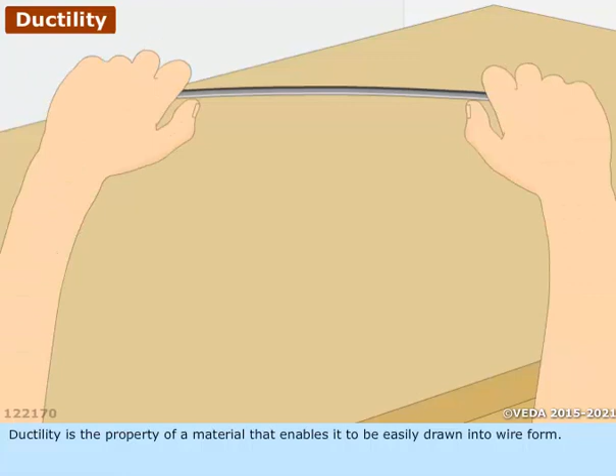Brittleness is defined as lack of ductility. When a load is applied, brittle materials break without bending or deforming.

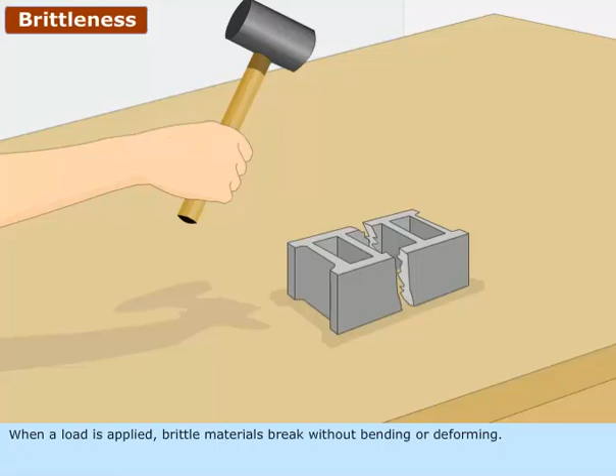Malleability is a property similar to ductility. If a material can be easily beaten or rolled into plate form, it is said to be malleable.

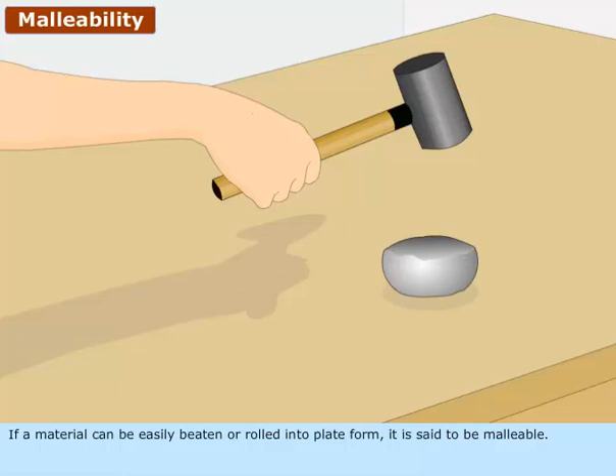If all the strains in a stressed material disappear upon removal of the stress, the material is said to be elastic. This is an essential property for materials from which springs and load-bearing structures are made.

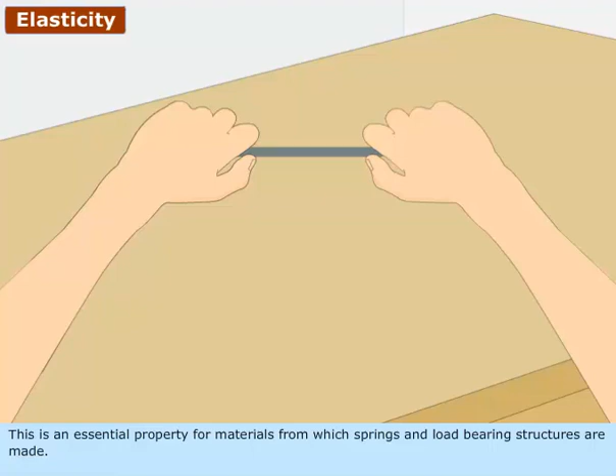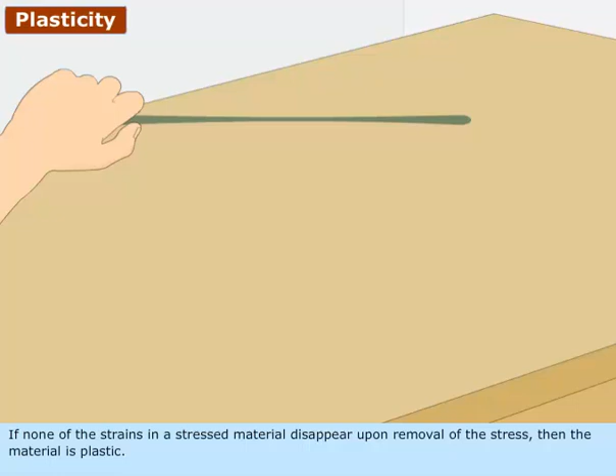If none of the strains in a stressed material disappear upon removal of the stress, then the material is plastic. Plasticity is the opposite of elasticity and similar to malleability. It is the ability of a substance to be easily bent or shaped without cracking and without any harmful internal stresses being set up.

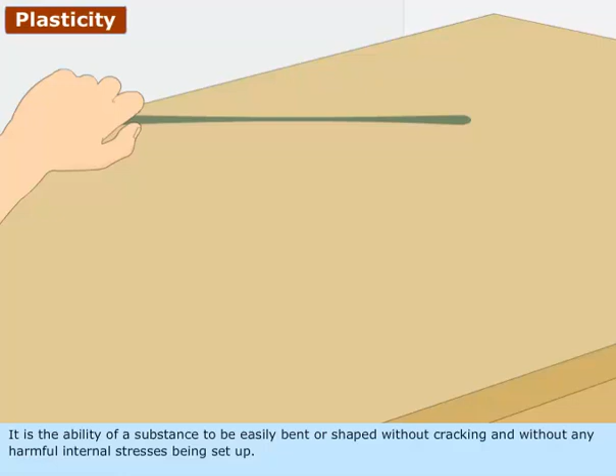The strength of a material is dependent on the amount of load that it can carry. The principal forms of strength in materials are tensile, compressive, shear, torsional, stiffness, and flexibility.

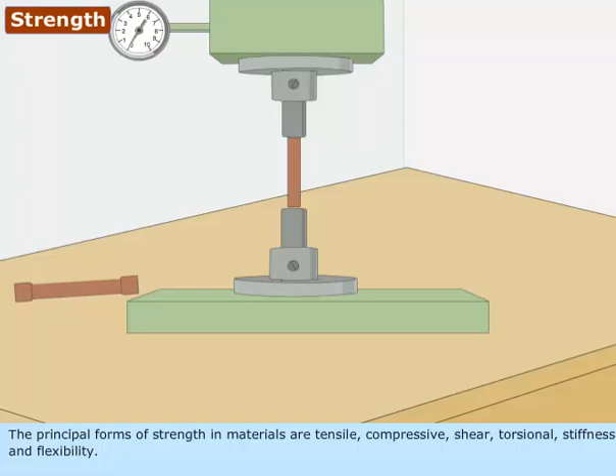Tensile strength is resistance to pulling or stretching forces. Compressive strength is the ability to support weight or resistance to squeezing forces.

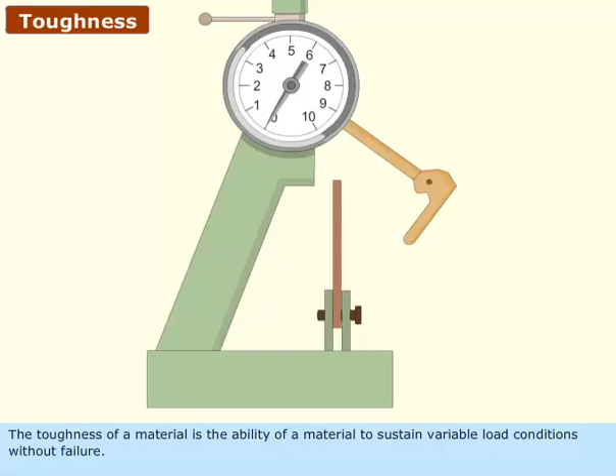The toughness of a material is the ability of a material to sustain variable load conditions without failure. Materials could be strong and yet brittle. Tough materials have strength and resilience.

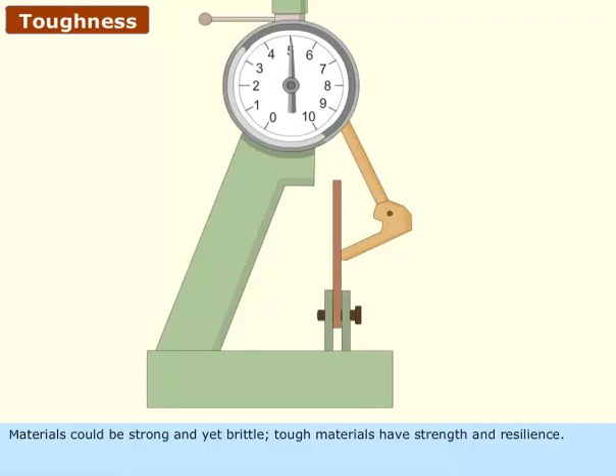Hardness is the resistance of a material to plastic deformation, usually by indentation or penetration. It is a measure of resistance to permanent deformation.

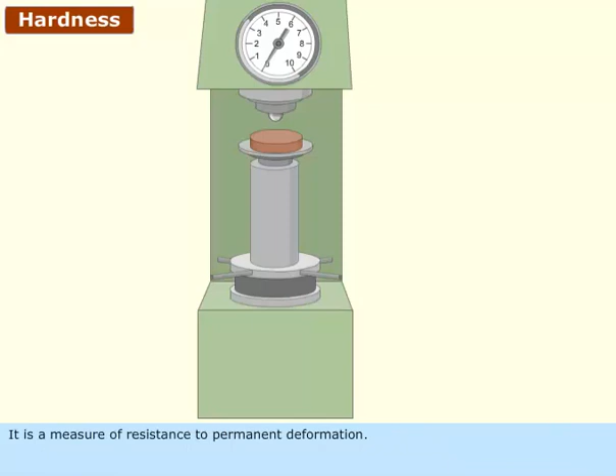The hardness of a material is determined by observing how far a hard steel ball or a pointed diamond will penetrate into the material.

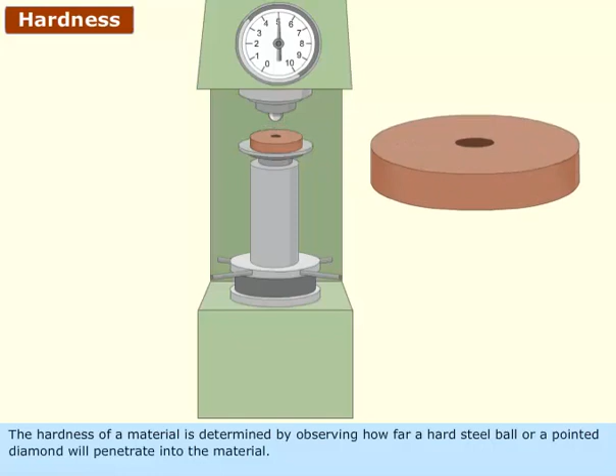Hardness of a metal is increased by alloying, cold working, and precipitation hardening.